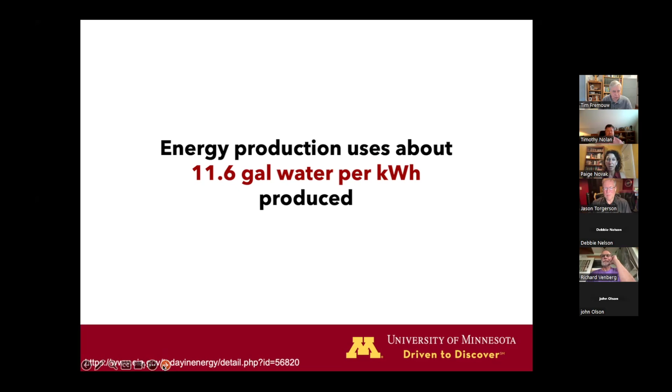So I want to start by talking about the intersection of water and energy, and just kind of putting out there how these are related. A lot of times we think about water and energy kind of separately, both of them as resources, but they're really quite interrelated. This first statistic is from the U.S. Energy Information Administration, and it's that energy production uses about 11.6 gallons of water per kilowatt hour produced. So in general, when we produce energy nationally, it uses quite a bit of water. And so energy efficiency should really have a dramatic impact on water use.

And so the more that we can start using alternative energy sources, the more that we can become more efficient in our thermoelectric power generation, the more this freshwater withdrawal will decrease, which is a positive.

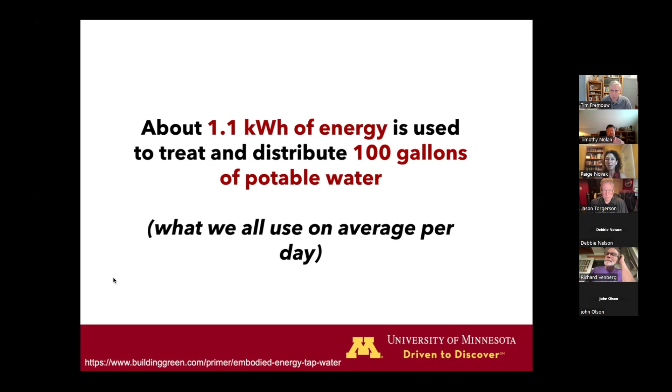Another link between water and energy is this statistic that about 1.1 kilowatt hours of energy is used to treat and distribute 100 gallons of potable water. And this is about average of what we all use per day. The numbers vary between maybe 70 and 110 gallons per day. And so there's a continuous energy required in order to treat the water that we use to water our lawns, to flush our toilets, to drink. A very small amount of that is what we drink, but we all use a lot of energy for our water.

And so what follows from that is that our water use efficiency should also have a dramatic impact on energy use. So energy efficiency impacts water use, and water use efficiency impacts energy use. And so we want to keep both of those things in mind.

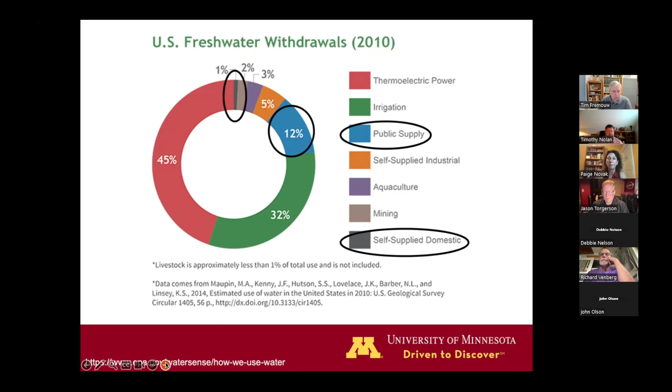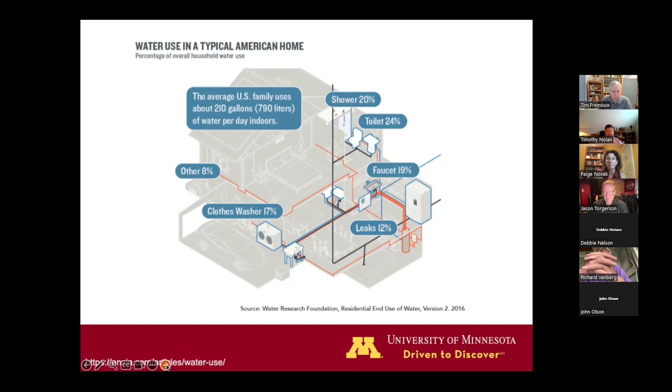And so, again, just thinking about this link between water and energy, the more that we can be efficient with our water use, the more we can decrease the energy that comes from that. And so, hopefully this set the stage of how water and energy are connected.

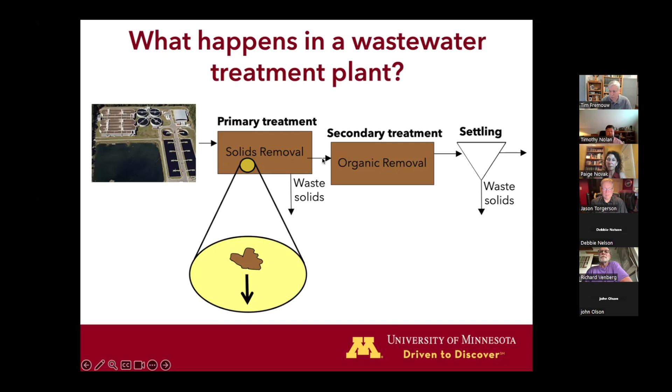So once we've removed our solids, we go to secondary treatment. And in secondary treatment, we have a whole lot of bacteria, just tons of bacteria in a big tank. And that bacteria eats the organic matter, the carbon that comes in. And those bacteria also eat ammonia that's present. And in order to get the bacteria to do that, we feed them oxygen. So they function kind of like we do. We might eat a cookie and breathe air. They eat our waste and breathe oxygen, same as we do.

And so when they do this, when they eat this material and breathe the oxygen, about a third to a half of the carbon that's in our waste goes to make more bacteria, goes to grow bacteria. And then the rest of it is discharged as CO2. So this is one of the first CO2 footprints of the wastewater treatment plant that we've talked about so far, and that's that all the waste that comes in at the influent, about 2/3 of that will end up as CO2.

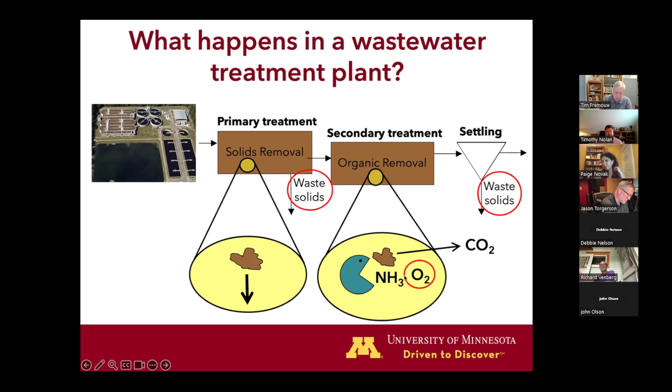Then we go to settling, and these bacteria that we've now grown settle out as waste solids. And so we have our waste solids that are coming out that we have to deal with, and then clean water that's coming out, and hopefully we've removed the nutrients that we need to. One thing that we also want to think about, so here's one of our CO2 impacts here. The other one is the energy use that takes place in a wastewater treatment plant.

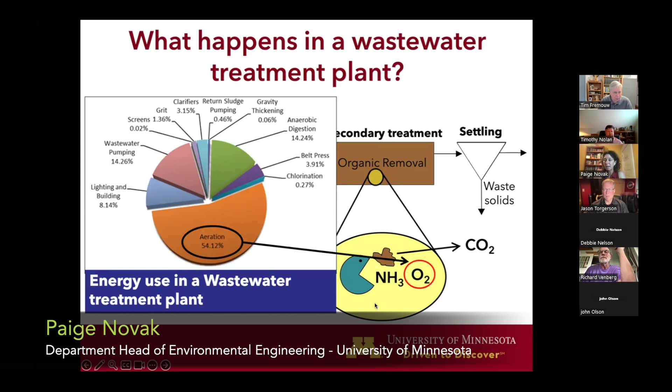And the first thing you notice when you look at this graph, there are all sorts of different things that we're using energy for in our wastewater treatment plant. But the big one is this big orange piece of the pie. About half of the energy used in a wastewater treatment plant is used for aeration. And that aeration is the addition of this oxygen. And so we just take big blowers and we take air, we compress it, we blow it into these huge reactors filled with bacteria, and this uses an enormous amount of energy.

And so looking at this, hopefully you're thinking, well, if there would be some way that we could get bacteria to do what we want them to do, but they don't have to breathe oxygen, then we might be in good shape, because then we would use much less energy. And so that's kind of where things are going.

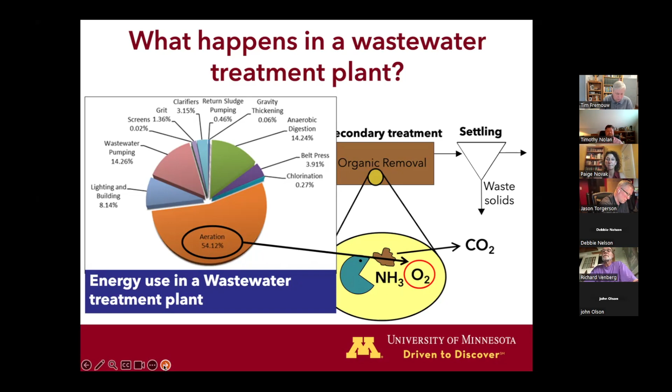So other things that happen in a wastewater treatment plant, I mentioned that we blend the waste from municipalities and industries. And so I want to kind of dig into that for just a minute. If we look at this industrial waste, a lot of these industrial waste streams are carbon rich. They've got a lot of waste in them, a lot of organic carbon waste, but they're typically non-human contact waste streams. So they're pathogen free. They don't have hormones. They don't have medications that we take in them. So they're kind of nice waste streams.

And some of these wastes, especially if they're high strength carbon rich wastes, they could be treated differently under anaerobic conditions, so no air addition, to recover that carbon as methane, which we can use as an energy source. So instead of in a standard wastewater treatment plant, if we go here and we blend it, then we've diluted it and we use energy to generate CO2. If we can treat it back up the stream, we can take this high strength wastewater and we can treat it in a different way that doesn't use energy or minimizes the use of energy, and we generate methane, which can then be used as an energy source from that.

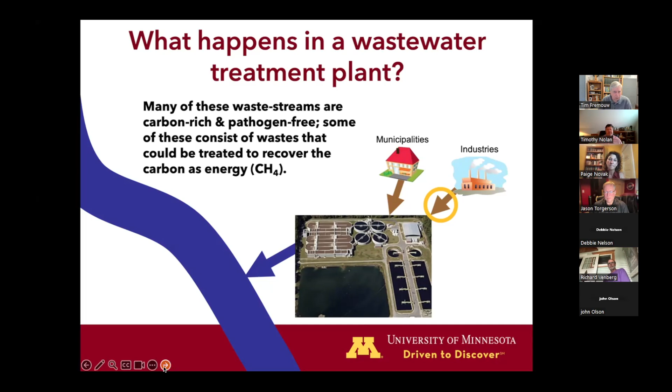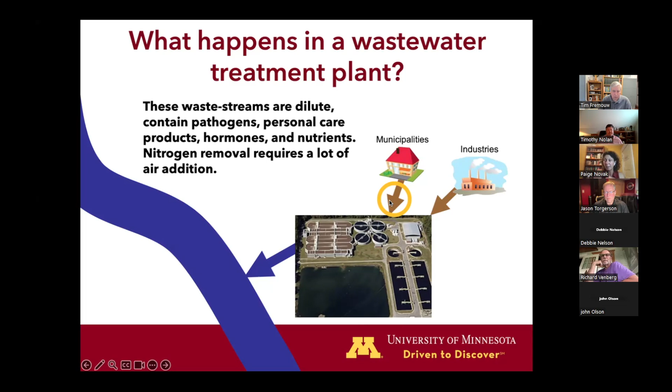If we look at this municipal waste stream, these waste streams are dilute. They've got all of our shower water, our toilet flush water, our dishwater, all of that's in that waste stream. And it also contains potential pathogens, personal care products, all of these things that come out of our waste. And one thing to keep in mind with this is that nitrogen removal requires a lot of air addition. And so if we can treat this dilute waste stream without adding a bunch of strength from our industrial waste streams, we can probably do it better and with less energy addition.

And so when we blend these, it makes resource recovery as methane from the industrial wastewater really difficult. It also makes nutrient removal harder, in particular nitrogen, and it makes treatment more energy intensive in general. And so what we've been doing when we combine these waste streams makes that carbon footprint much larger than it really needs to be.

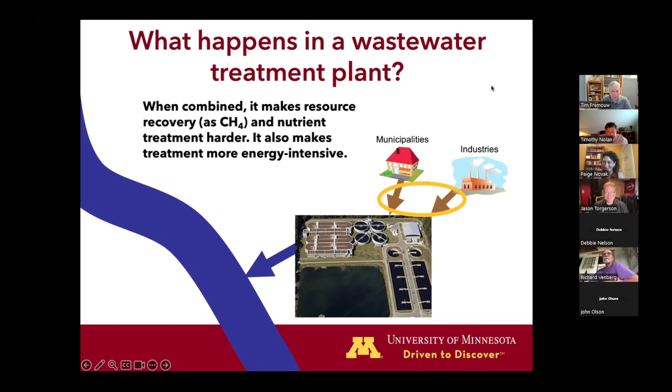So I'm going to stop and blow everyone's pictures up again. Is everything good? Does it make sense so far? Yeah, okay, good. Okay.

So we need to change the way that we treat wastewater to decrease or hopefully eliminate its contribution to climate change in terms of its high energy footprint and high carbon footprint. And so what are some options to improve practice? There's been a lot of interest and work lately on creating energy neutral or even energy positive wastewater treatment plants. This is something that globally people are working on, and some of the more forward-looking wastewater treatment plants in the US are really interested in this.

And some of the ways that we can do this, energy efficiency improvements is a big one. So using LED lights, doing different things to make the system and the processes and the buildings more efficient. Using renewable energy in plant operations. So instead of using carbon based fuels, using solar, something like that. Energy recovery from waste solids. I showed you that we have those waste solids, so the solids that come in and then also the bacteria. We can take those waste streams and we can generate energy from those by treating those anaerobically and making methane as well. And so that's something that we could do.

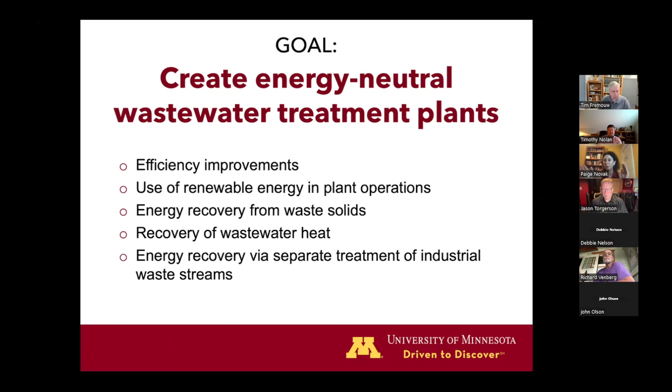Wastewater's typically got a lot of heat associated with it, and there's been a lot of interest in using that heat to warm other waste or other water streams, so we don't waste that heat. Also, separating industrial treatment from municipal treatment and recovering energy from that industrial waste. And the last one is low energy nutrient removal. I mentioned that nitrogen treatment uses a lot of air, it uses a lot of energy, and there are new ways that we can think about removing nutrients using low energy methods. And now there's a lot more interest in recovering nutrients so that we can use it for something positive rather than fixing more nitrogen industrially and using that for fertilizer.

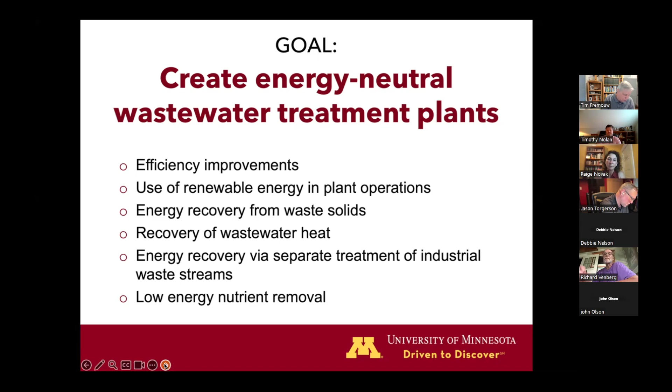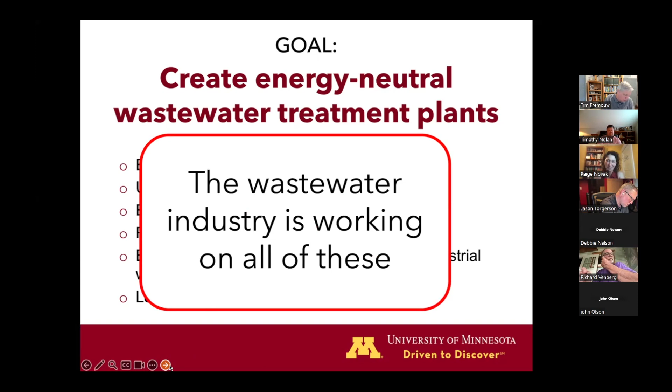And I would say that the wastewater industry is really working on all of these areas. Some plants are not working on any, and some plants are doing, I think, a great job working on all of these areas. One example just right up the road is St. Cloud. If you're looking for another speaker on wastewater, I definitely recommend Tracy Hodel. She's fantastic. And I think St. Cloud is doing so many cool things to really improve its energy footprint and really make itself energy positive.

They have done a lot with respect to energy efficiency. Their plant is incredibly efficient. I'll show you a picture in a minute of their solar array. They generate a ton of energy from solar. They have a really unique program where they take industrial waste separate from their municipal waste. They don't blend the two, and they're using that to generate energy.

They're generating energy from their waste solids and also recovering nutrients from their waste solids. And they've got a new project where they're generating hydrogen from electrolysis, which I believe is solar powered. And so they're really doing a lot of cool things in order to really kind of push the field forward in terms of wastewater.

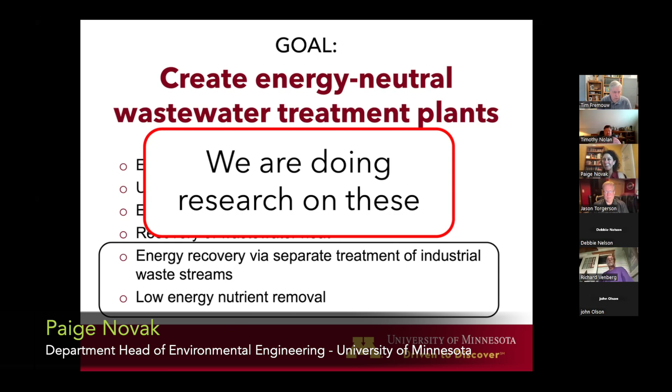When we think about kind of what I do and what researchers are doing globally, there's a lot of research going on in wastewater, and a lot of that research is focused on energy recovery, also nutrient recovery, either from the municipal wastewater blended streams or from industrial waste streams separated, and then also low energy nutrient removal. And in my lab, we've been working on both of these areas for some time. And I'm just going to give you a quick tour of some of the stuff we're doing, and then I'll wrap it up.

So some of the work that I've been doing has focused on this idea of encapsulation. So I love bacteria. I work with biological treatment processes. And with encapsulation, what we can do is we can retain very specific organisms. And so we can control how many organisms and which types of organisms we have. And then to some extent, we can protect those organisms and control their internal environment. And so we can get them to do what we want them to do.

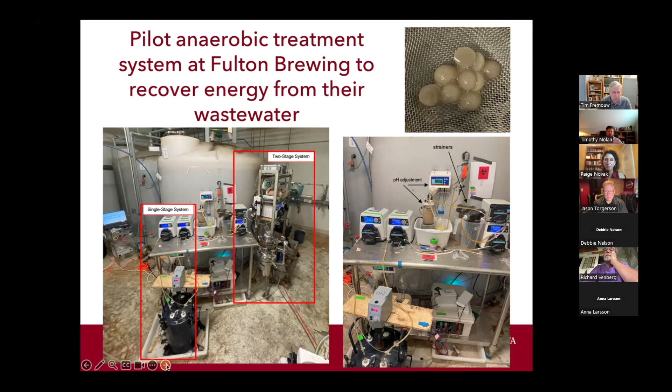And then right now what we're doing is we're collecting our gas passively. You can sort of see these little bags back here. We have these Tedlar bags that we plumb in. And so we're collecting the gas so we can measure how much the bacteria are generating and what kind of gas. And then we are working with some colleagues in mechanical engineering who, once we get good baseline data, are going to start actively extracting that gas to see if we can get more of that gas out.

One of the things that you can imagine could be a problem: methane is a gas, but it's also reasonably soluble. And these waste streams are pretty warm, which does drive that methane out, but you still end up with a fair amount of methane dissolved in that liquid effluent after it's been treated.

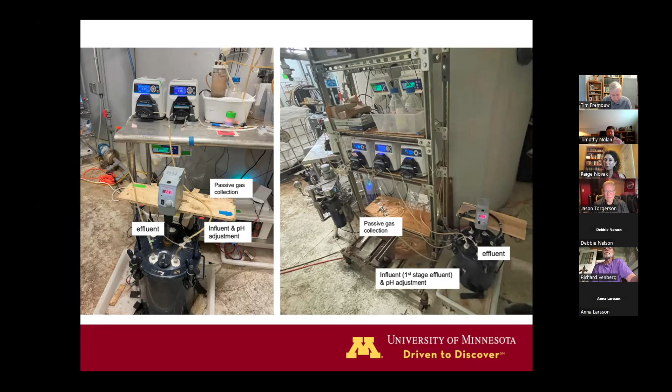And so one of the things that we're really interested in is, can we do some sort of active extraction to pull out all of that methane, so we are using everything we're making and we're not making a worse greenhouse gas problem. We're also exploring ways to encourage low energy nutrient removal.

And what we've been doing, I've been working with colleagues in chemistry and chemical engineering to develop supports that encourage the growth and retention of specialized bacteria that perform low energy ammonia treatment. And so there's just a little bit of oxygen that's needed. You don't need to add very much, and it uses about a third of the energy of traditional treatment.

And so we've made these little pucks that basically absorb ammonia, and then the bacteria are attracted to that, and then they grow all over these pucks. And then we also have made membranes, which you can see here, and we grow a surface on there that attracts, again, the ammonium and then the bacteria, and then they colonize these membranes, and they use that ammonia more effectively.

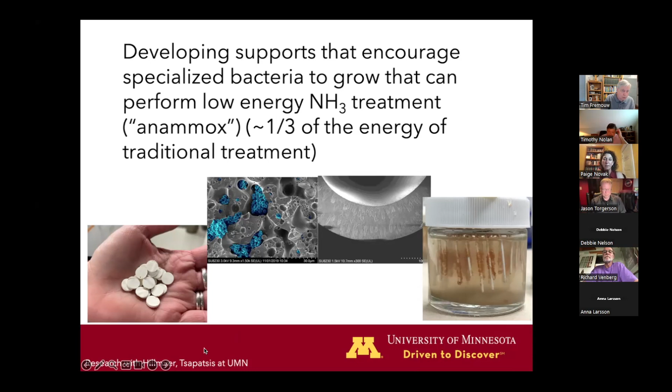And so this is what we've been working on, and now we're actually moving these pucks out into stormwater treatment to see if they'll work effectively there. So that's it for my little tour. So I just want to finish up with kind of the bottom line. And these points are all either paraphrased or taken directly from the EPA. So these are the things we need to do.

We need to have efficiency in the use of energy and water be the norm. We need to make sure we're using our energy really efficiently so that we're not wasting water and potentially causing ecological harm. We also then need to make sure that we're using our water effectively and efficiently so that we don't waste more energy cleaning that water.

We need to develop energy resources in a way that has minimal impact on water, both in terms of quantity and quality. So things like fracking, where you're then contaminating that water. We need to think about better ways of extracting energy and using our energy resources so we're not damaging this other resource at the same time.

The pumping, treating, distribution, use, collection, reuse, and ultimate disposal of water should have the smallest impact on energy resources as possible. So we need to be as efficient as possible. And where we can impact this is really in the use. And just thinking about water and its energy footprint when we're using that water.

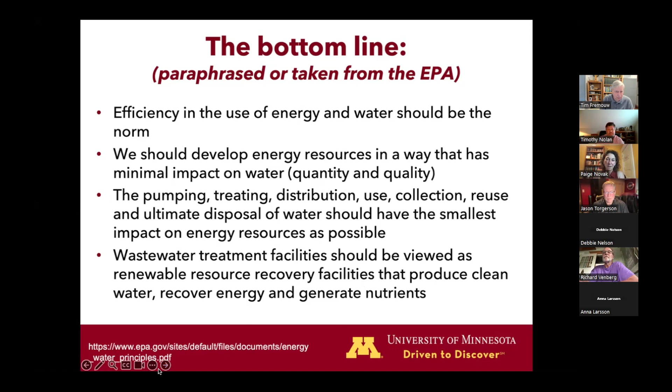And then finally, wastewater treatment facilities should be viewed as renewable resource recovery facilities that produce clean water, which they pretty much do now, depending on what you're looking at. We can recover energy from that wastewater, and then we can also generate nutrients that can be used. And so that's it. Thank you, and happy to chat and answer questions.

Tim, you have a question? I have just an extra point. One of the problems we have with climate change is making our infrastructure resilient. Yeah. You ever notice where wastewater treatment facilities are? A lot of them are in floodplains. So there's a lot of danger of flooding and then incapacitating those facilities. So you need to look at backup energy. You need to look at that whole scenario to make these systems much more resilient than they are.

The other quick point is energy distribution. The piping is the largest part of energy. And a lot of our piping infrastructure, all you have to do is look at Duluth, is very antiquated. So we've got a lot of catching up to do just on building resilient infrastructure. Yeah, those are great points. Thanks.

Tim. Okay, I want to quickly make a shout out to Ryan Kiefer. He just joined our chapter yesterday. So welcome, Ryan.

Then my question deals with nutrient recovery. You mentioned that's a focus. Well, how about human waste? Is there any progress in making it usable for, say, fertilizer? Or I know there's concerns there. Yeah, there's a lot of work going on in that area. There's research.